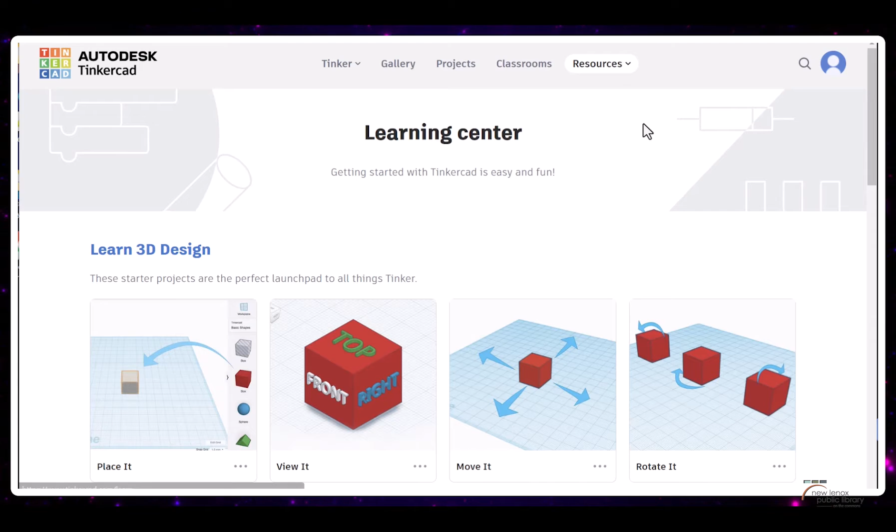So you know the extra resources TinkerCAD has to offer. Now this is my main page, and I'm going to show you how to access the Learning Center. It will give you great tutorials on how to work TinkerCAD, and I highly suggest you try this out first. If you're brand new, you get to learn different things that's going to help you in the future. All of these lesson plans are the first basics that will help you navigate TinkerCAD from the very start, right after you create your account.

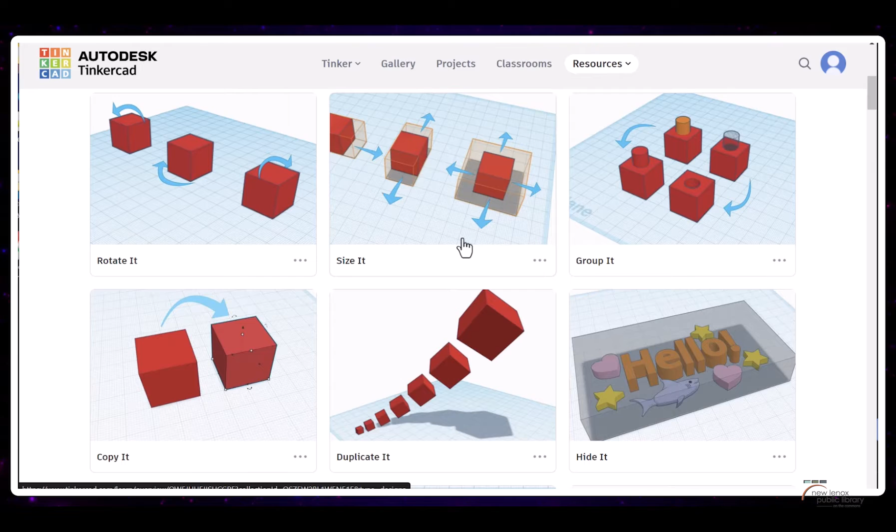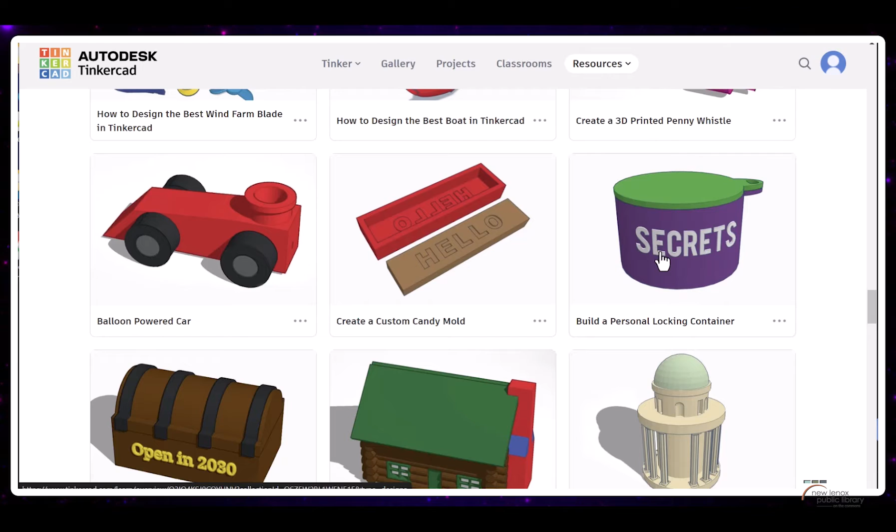So these are some of the easier lesson plans, and some of them are really quite fun. You can make a whole set of your own buttons, a keychain, glasses. There's some fun stuff on here. This month we're going to use one of these: build a personal locking container. I chose this one because I thought it would be a unique build, and also it creates a different kind of challenge, because this is about learning how to twist an object into another object.

With that being said, you can access this here, or if you go back to your main TinkerCAD page by clicking on the logo at the top left, you have classes, TinkerCAD challenge. In this section, this is what I can see. You can't see anyone else, but I just want to show you from my standpoint how I'm able to assign something to you. So I did assign that.

I'm going to go into activities up here, and it should be in here: build a locking container. If you do not want to sign up for the TinkerCAD challenge, you don't have to. You can always go back, like I showed you last time, to Learning Center when you click on resources at the top, and click on Learning Center there to access build a locking container. Just be on the lookout for this challenge.

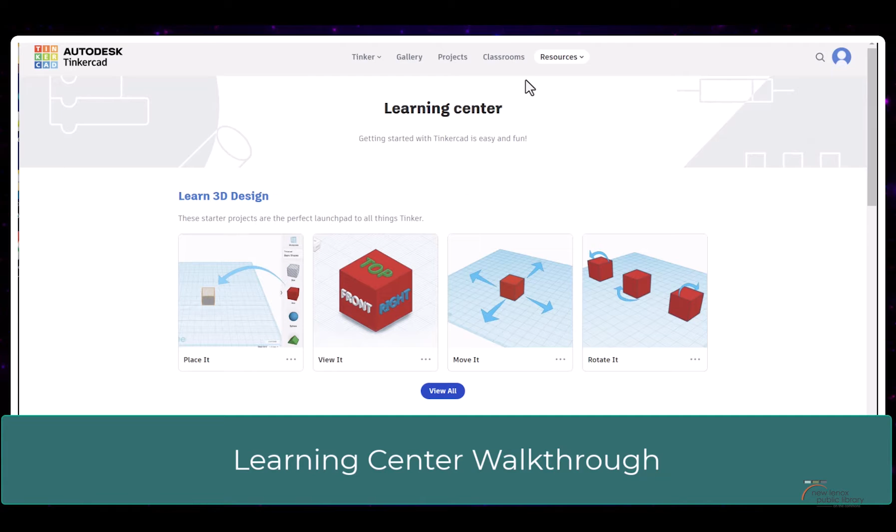So this is what building a locking container looks like from this page. I'm going to click on Start Tutorial, go to Learning Center, and go to View All. Through the Learning Center, you're going to find Build a Personal Locking Container.

Now, I already added it to class activity, so if you wanted to do that, you can go into the class activity section and find it. But here, it has 3 tutorials. I'm just going to do the first 2. The third one involves adding text, and you're welcome to do that if you want. I'm not going to do that for mine because I just want to show you the basics of how to make the container. So I'm going to click on this.

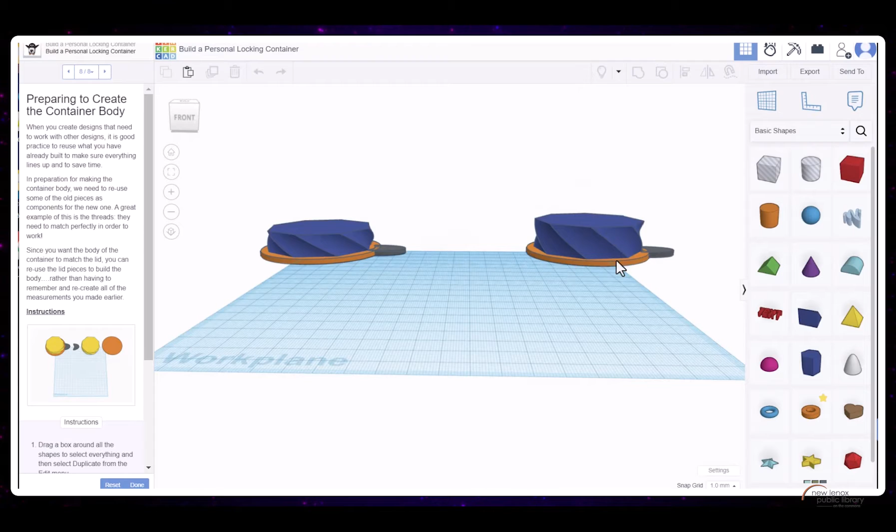This shows me what I have made and how I finished the tutorial. If I were to go back to the beginning, it will look like this: build a personal locking container. So I'm going to start following along with the directions.

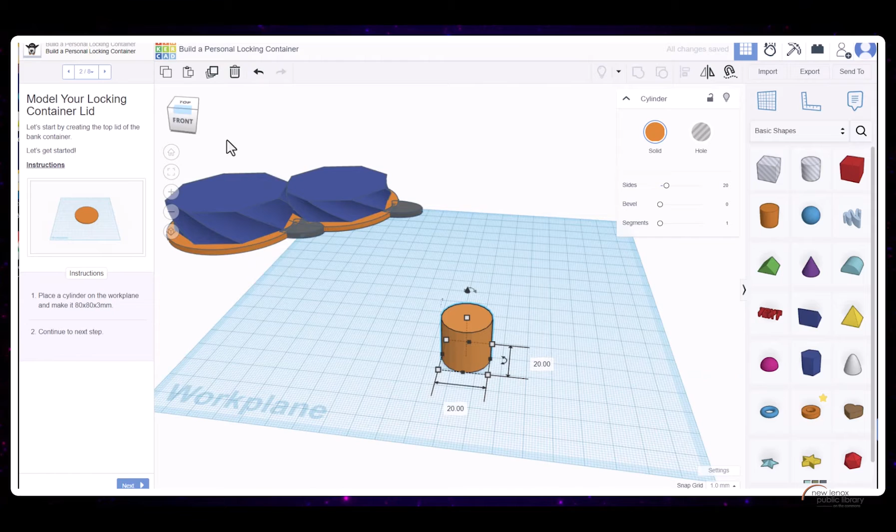The first instruction is to place a cylinder on the work plane, making it 80 by 80 by 3. So I'm clicking on this, changing it to 80 - see, it stretched out one side. I'm going to zoom in on this piece so I can see a little better. The way I'm doing this, I'm clicking on the white corners to open up these 2 menus that give me the width and length, and clicking in the menus to change the size.

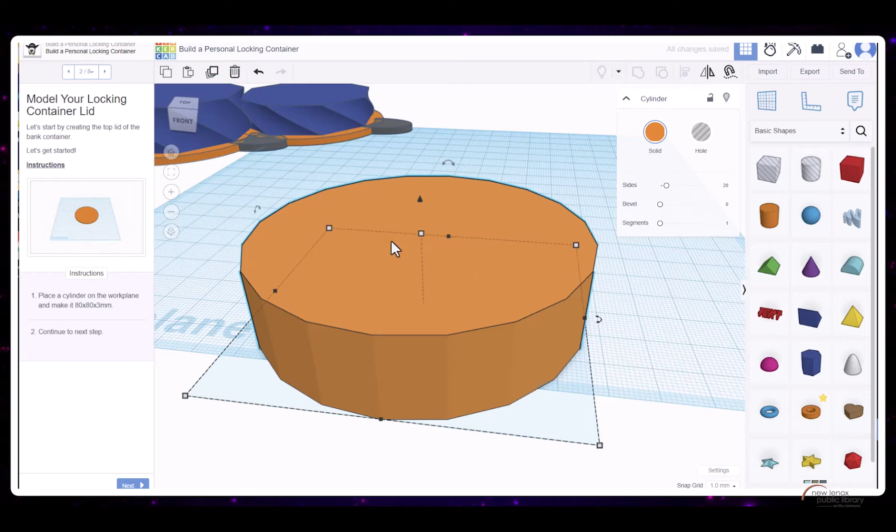Now I'm going to click on the white square that's kind of floating in the middle above everything else. It's kind of hard to tell here, but if I turn the camera, you can see that it goes all the way to the top in the middle.

That adjusts the height, so I'm going to click on that and type in 3, hit enter. So I'm done with this portion.

Add the locking tab. This will go over all the things you need to know about the locking tab. I also want to point out, when you click on the picture, it actually zooms in so you can get a better understanding of how the page is supposed to look. Okay, so I'm in the process of making this gray tab piece right here.

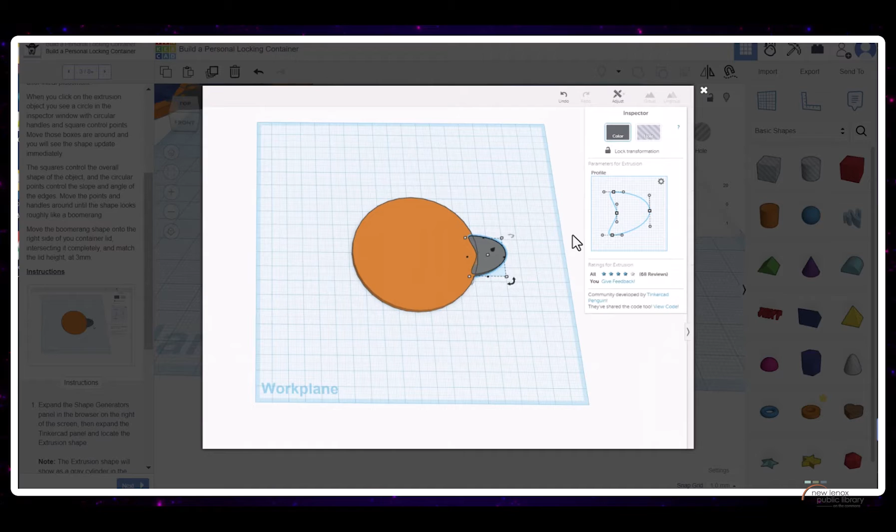It says expand the shape generators panel in the browser on the right. Where it says basic shapes, I'm going to click down at the bottom to shape generators, click that, and I'm actually going to search for this shape using the magnifying glass. We're looking for the extrusion shape, so I'm typing in extrusion.

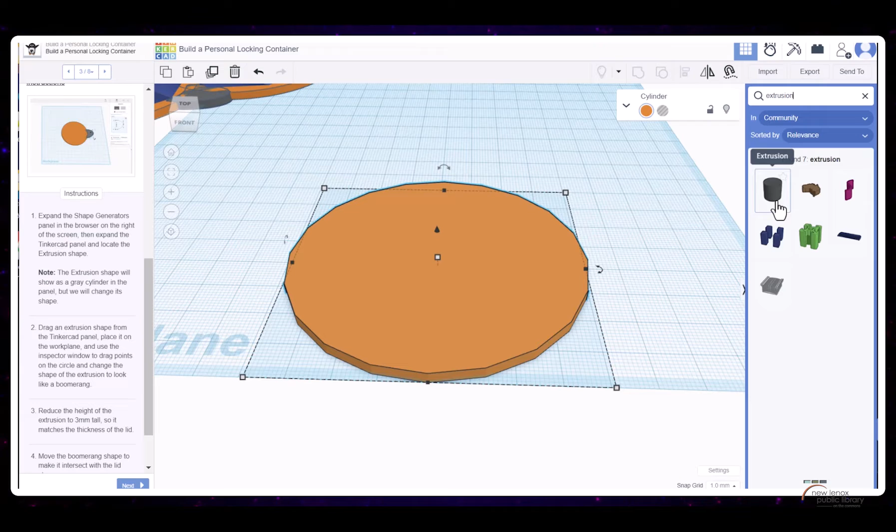And it's right here, it shows a gray cylinder. So this is what I'm looking for, as it says extrusion and it looks like a gray cylinder. I'm putting it down right there, and I'm going to close this out.

It says use the inspector window, so I'm going to move this over so I can see what it's doing from here a little better. So this is the inspector window, and reduce the height of extrusion to 3 millimeters tall.

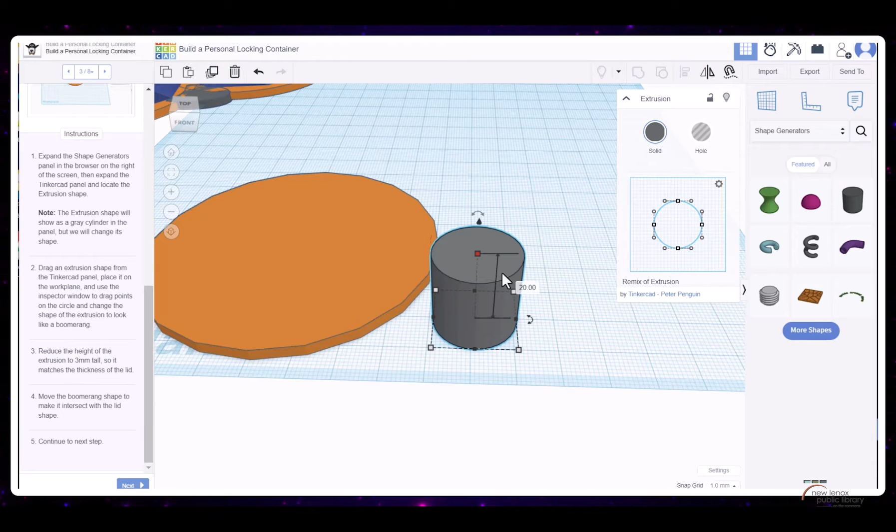I'm going to open up the image again. So it kind of looks like a D shape, but with that one edge pulled in a little more. I'm going to follow that a little bit. As you see, as I'm moving it, it's actually adjusting it.

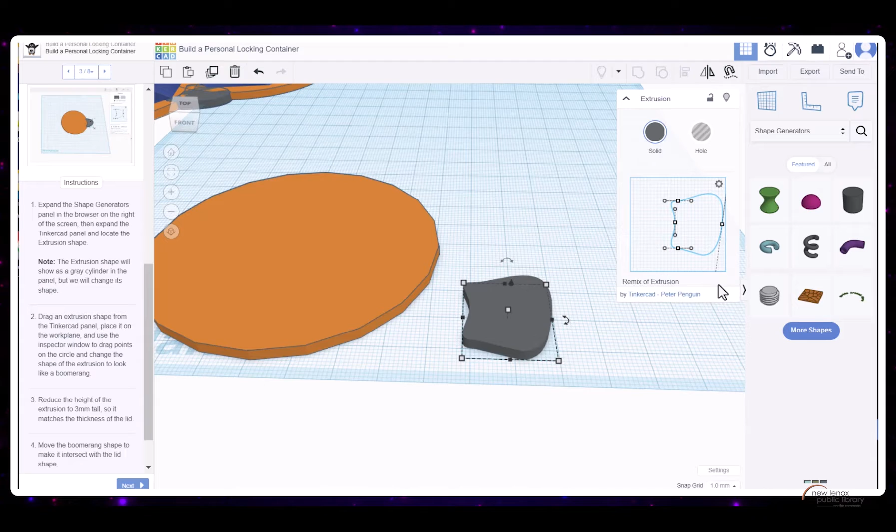The way you can round it out or pull it back a little more, these little arms that are off the squares, they allow you, if you click and pull, it actually expands them, or if you put them closer, it retracts, so it's more pointy or more rounded. I'm gonna leave mine like that. I think that's good, it looks pretty similar to the picture.

Now it says reduce the height, I already did that. Now move the boomerang shape to make it intersect with the lid shape. The way I could tell it's intersecting is because the corner of the shape is gray, so that's how I know it's intersecting, and I can kind of see the colors merging together.

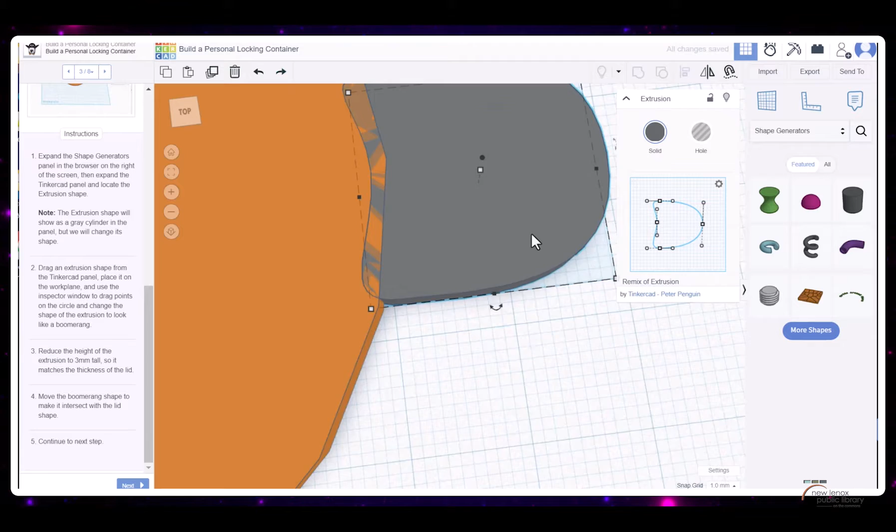Now I'm going to continue to the next step. It says make some threads. Here's the part where I did have to change this a little bit, because TinkerCAD no longer has this shape, it's called something else.

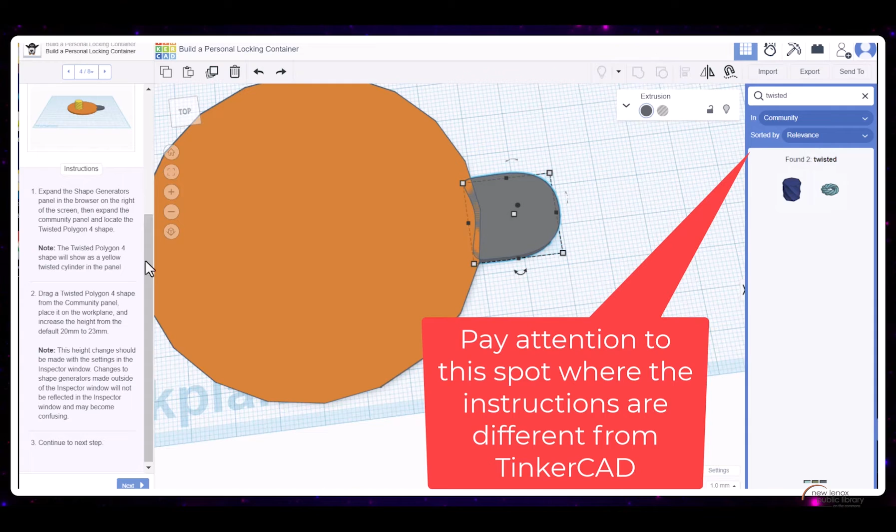I'm going to search the shape and type in twisted. I'm talking about the twisted polygon shape. It has twisted polygon, but it doesn't have twisted polygon 4, so my guess is they probably got rid of that shape because this one serves the same purpose. Okay, so I'm pulling out the twisted polygon shape.

It's blue, not yellow like it shows in the picture. It says drag a twisted polygon shape from the community panel, which was here, and place it on the work plane and increase the height from the default 20 to 23. So I'm clicking on the height, it says 20, and I'm changing that to 23. It doesn't look like it changed much, and now I'm going to continue to the next step.

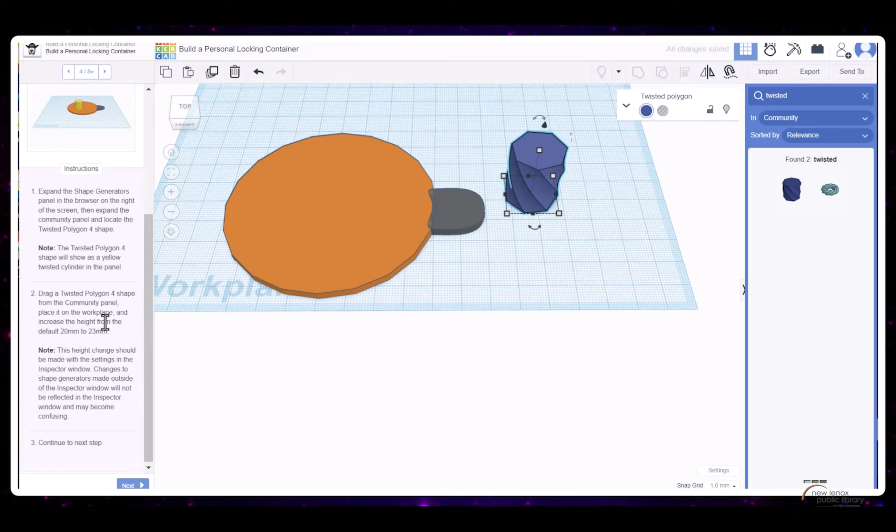Okay, so align the threads to the lid. It says hold down the shift key, so I'm holding down shift on the keyboard and click twisted polygon, then select the lid at the same time. I'm going to hide these other shapes because we don't need to look at these, it'll be a little easier to follow along. So I'm clicking on the twisted polygon, holding, and now I'm clicking on the lid.

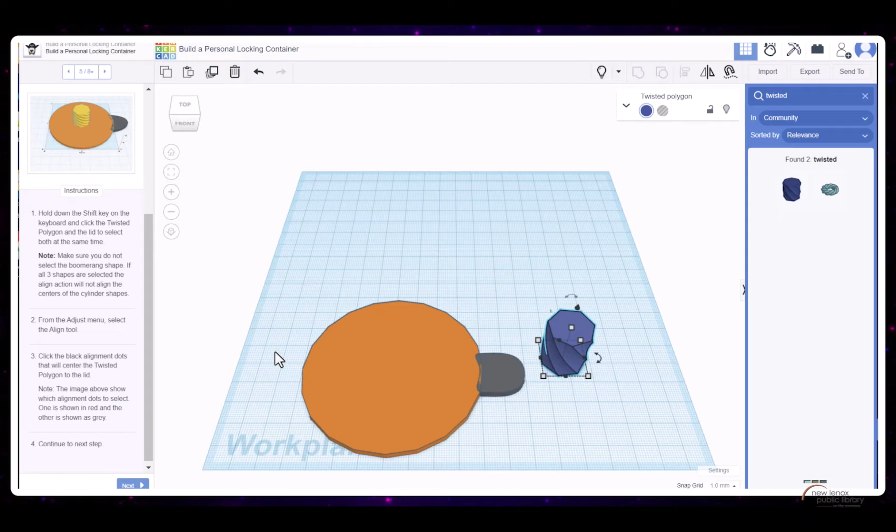It says we do not want to select the boomerang shape, so I'm leaving it alone. Clicking them both at the same time, the twisted polygon and the lid. I'm going to the alignment tool.

Now I'm going to click on these black dots to figure out how to get this centered. I'm going to click on this one, so I'm centering it from the back. I'm going to see if I could... there we go.

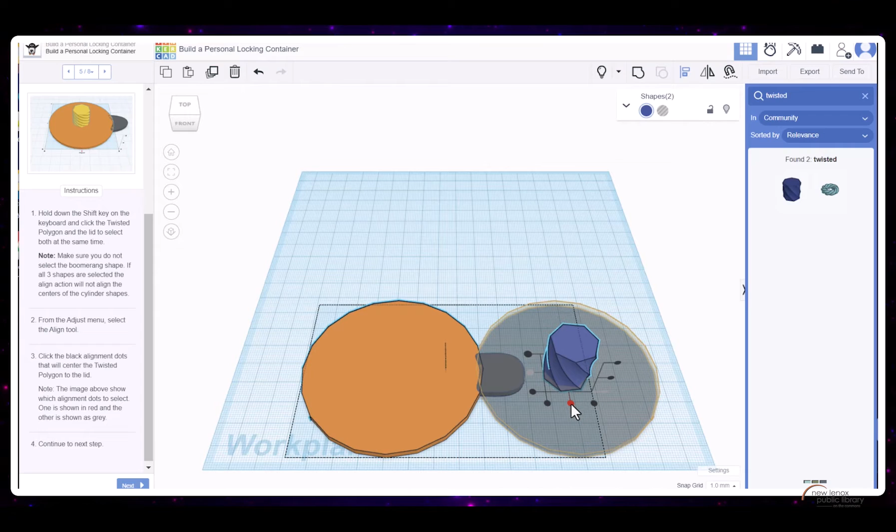Okay, so now I selected the twisted polygon and click on the center here. So now the orange one is centering through there, and now I have to move the tab over, I'm just going to use my arrow keys for that. So it's back where it started from. Kind of looks like a duck face a little bit, it's pretty cool. Okay, so it is centered, and now I'm going to continue.

It says configure the threads.

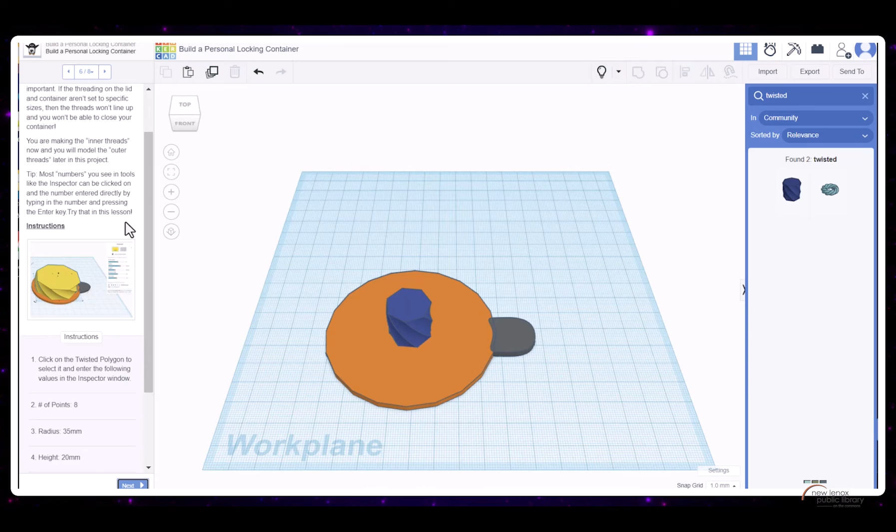So here I'm going to click on the twisted polygon and follow the values that they have. Number of points, they say 8. I'm clicking on the numbers, and now I can type in a specific number, and when I do that, it will change as we go along. Radius is 35, so I type that in.

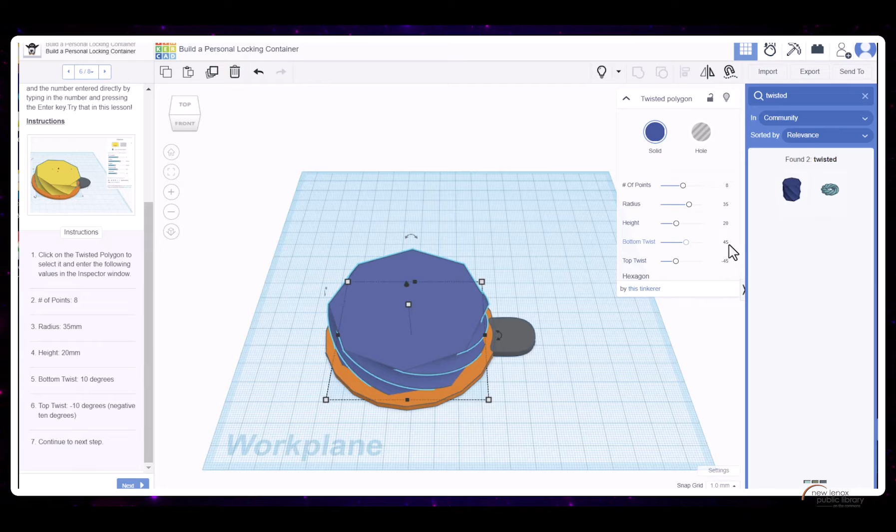This is going to increase the sides. Height is going to be 20, so that's the same. The bottom twist says 10, and I'm going to see if that will work. And the top twist is -10.

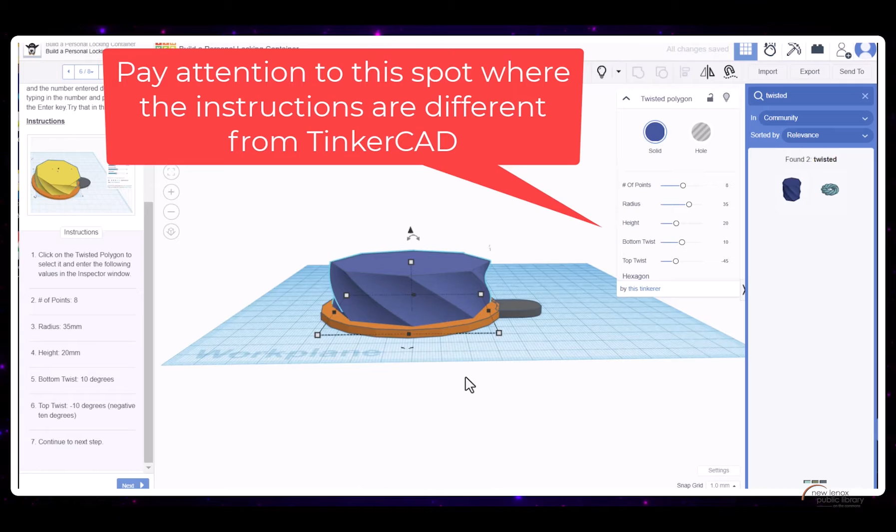So here's where it looks different from the picture. I'm going to click on the picture and show you that it's supposed to look like this. It's not as twisted as it should look. So we're going to keep the bottom twist as 10 and the top twist as 45 or -45 because I think this will look closer to what the yellow piece is, and I think that would serve as a better locking device.

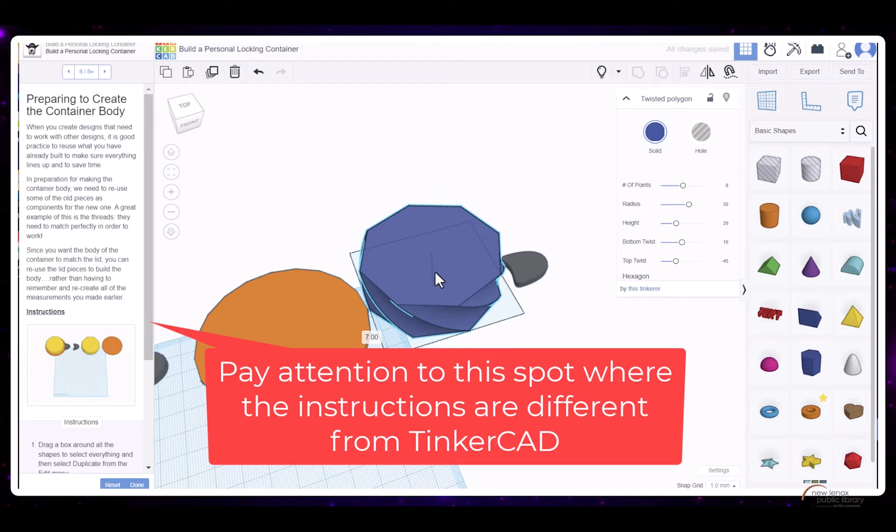So now that that's done, here's another example too where it is a little different. I don't know if back when they first started doing lessons, when you hit done, it moves to the next set and you don't have to worry about saving anything.

What we're going to do here, we're going to select each one separately. We're going to save our shapes so that we can use them for the next step. So in Shapes Library, click on Your Creations, and you'll see some of the previous stuff I've done that I've saved.

I'm going to delete some of the stuff I did earlier with it, so this way I won't get confused.

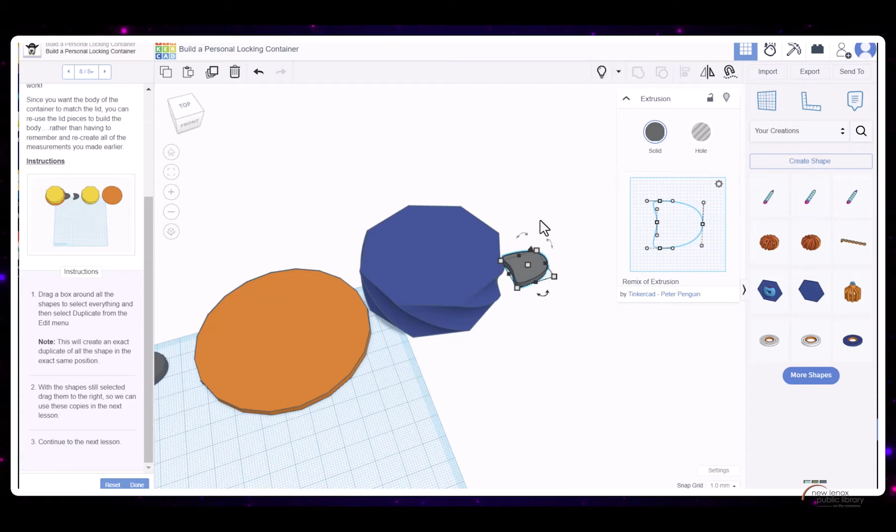But I do want to add each one of these to the shape of my creations. So I have the boomerang tab piece selected. I'm going to hit Create Shape. I'm going to call it the tab, and I'm going to save it.

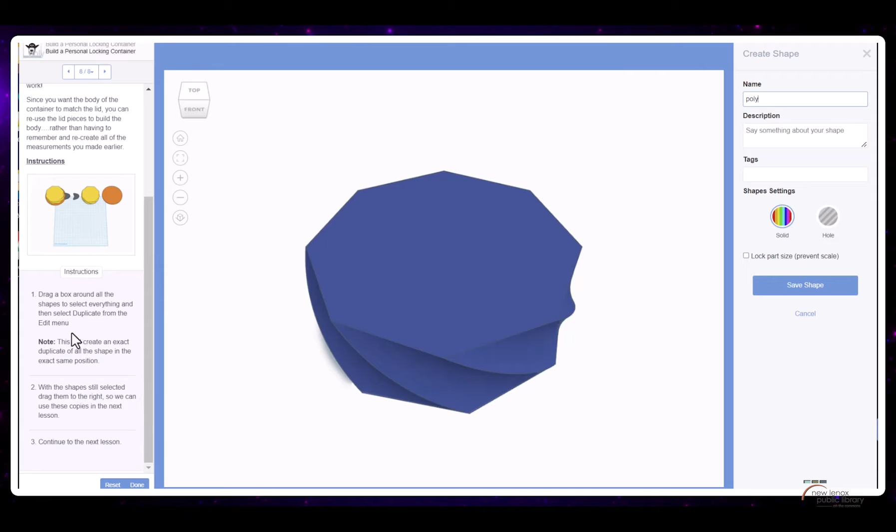I have the twisted polygon now selected. I'm going to create that shape and type—I'll call it polygon. Okay, and now I'm going to select the lid or the top piece, create shape, and I'm going to just call this lid. Save it.

So now all three of these I can access for the next part of it, which we're going to create the body. So now I'm going to hit done, and where it says make the body with a locking tab, we're going to click continue.

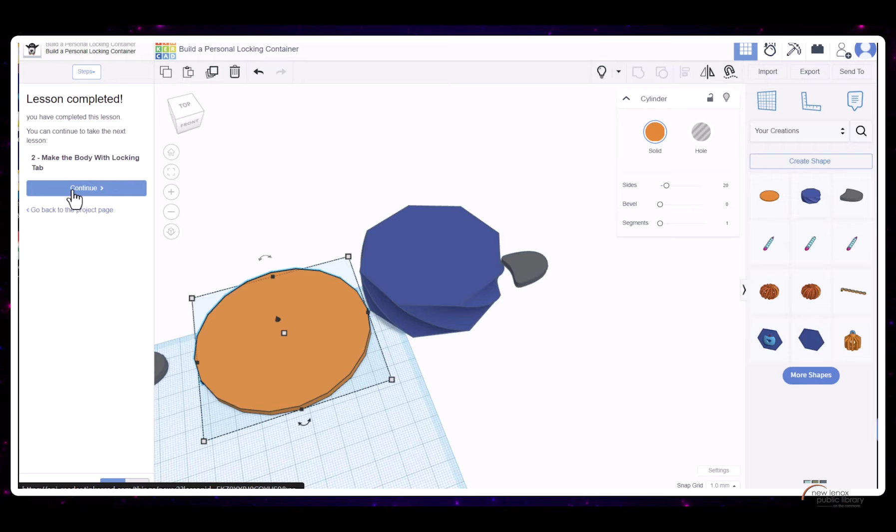Now once again, because I already practiced with this, I'm going to hide these, and it's going to look like your work plane. So I'm going to actually click on that, and this is how yours should work. So this is how it's going to look. I'm going to go to page 2, and it says model your locking container lid.

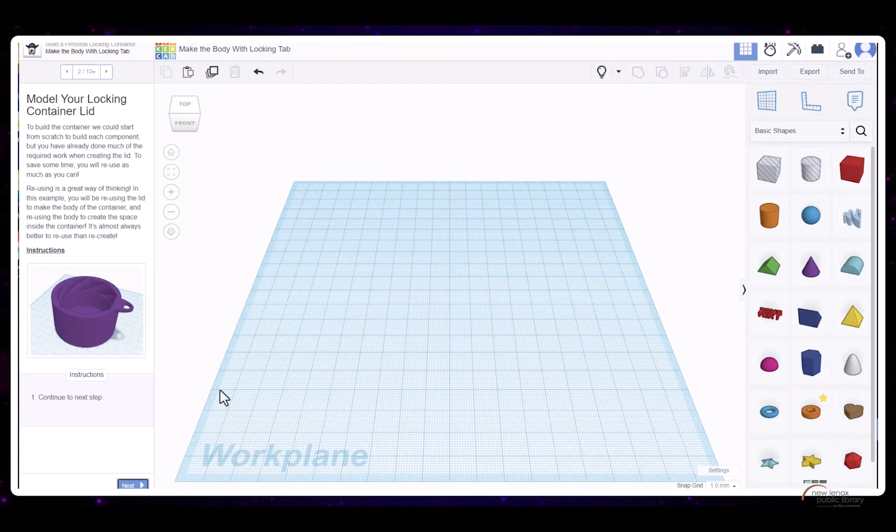So now to build a container, we could start from scratch and build each component. And we're going to reuse the shapes that we already made to make the inside of the grooves, because that's how it's going to fit correctly.

So with your creations, where it said basic shapes, I clicked on your creations. I'm going to drag out the lid. Now when I do that, I'm going to make sure it's still selected, click duplicate, and I'm going to use this lid as my base for the body.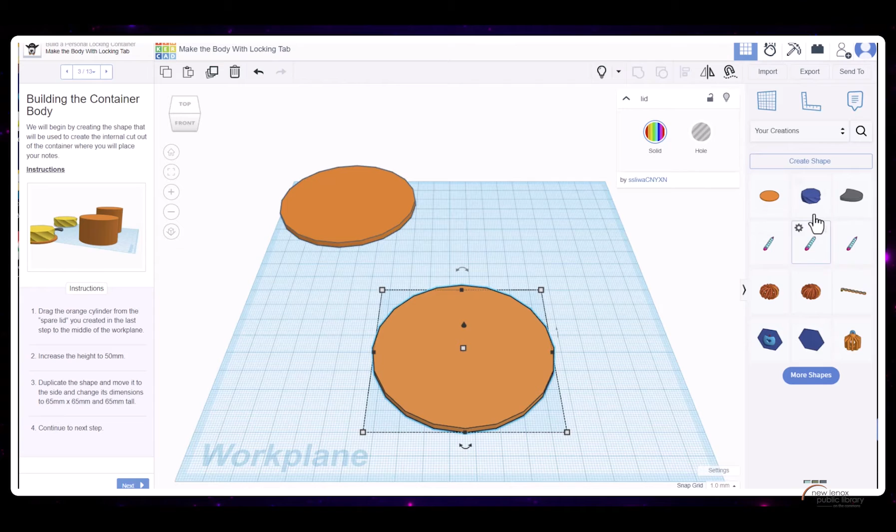So this is my spare lid. In the meantime, I'm also going to drag out the other components too, just to have those ready. So now they're all right here, ready to go. Kind of put them all together too. I'm not going to group them just yet, but I'm going to leave them like this.

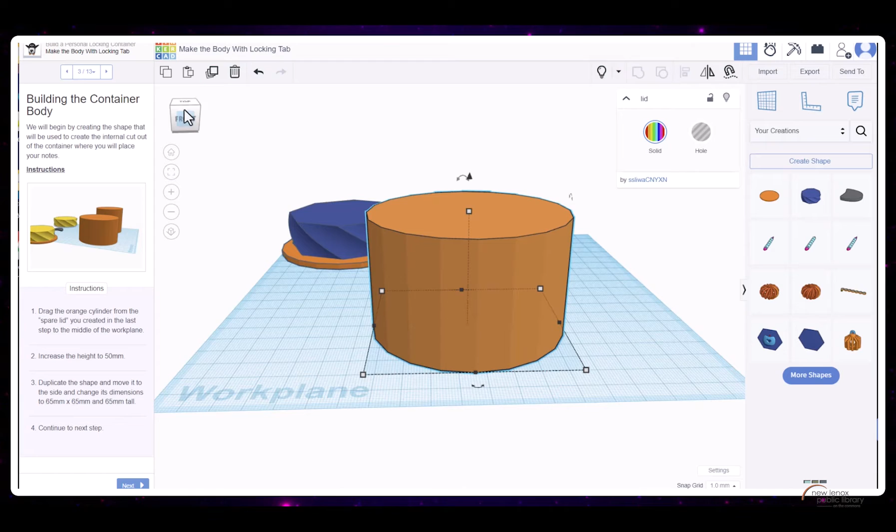So it says increase the height to 50. Duplicate the shape and move it to the side, and it changes dimensions to 65, 65, and 65. Just moving that—this is my duplicate, so this would be 65, 65, 65. Okay, so that's all set.

I have these two shapes. You should have those two shapes too. Now I'm going to click Next.

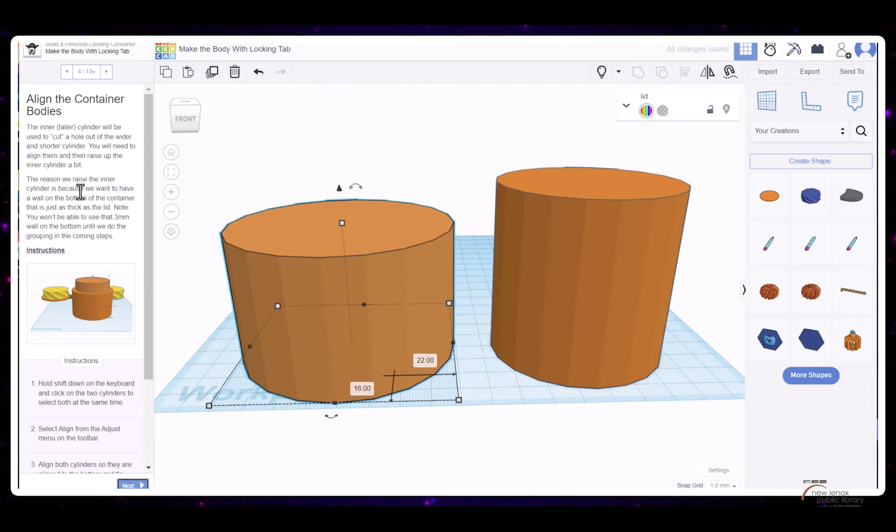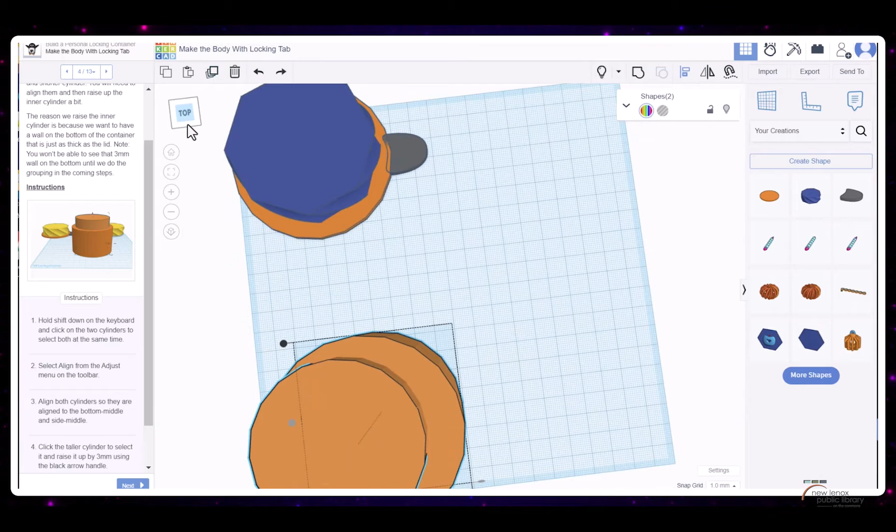The inner taller cylinder will be used to cut a hole. So now I'm going to hold Shift, click on two cylinders and select them both, and we're going to do the alignment tool again. Okay, now I want to make sure that I'm trying to see if I can try to move this over. Maybe it will help if I have a top view. And I'm going to focus strictly on these two.

There we go. So I had to click on the two middle pieces and align them together.

Now it says click on the taller cylinder and raise it up by 3. I'm on the front view, which will help a little bit. When I click on the arrow up caret, I get the option to type in 3, or you can move it by yourself. So I'm moving it up to 3. It went from 0 to 3, and down here it shows 3. Click on the next step.

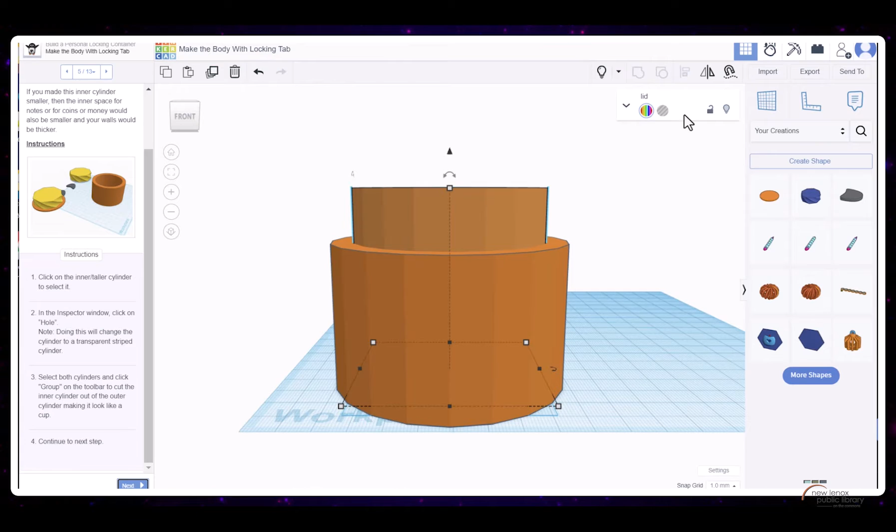It says click on the inner taller cylinder, so select it, and then click on hole. Now I'm going to select them, holding Shift, and selecting the base and hitting this group key up here. So now it should have cut a hole in it, so it does look like a little container right now.

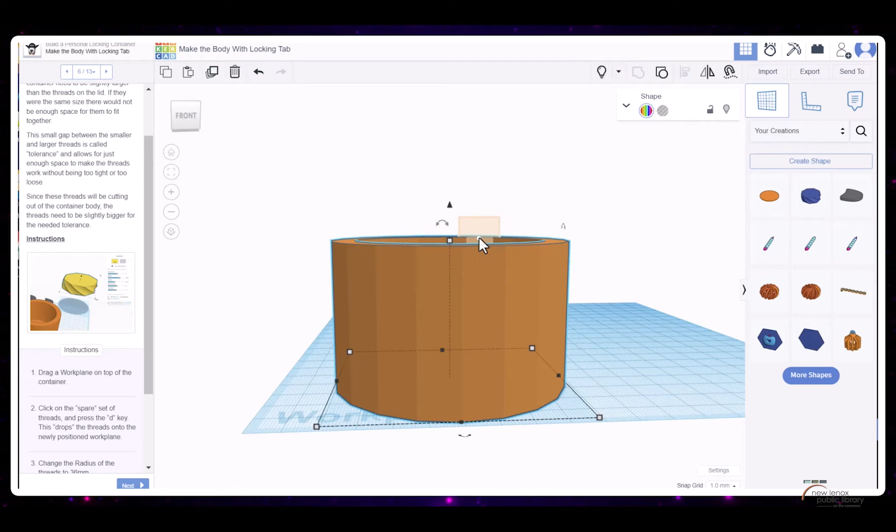Click Next. So now we have to drag a work plane on top of the container, using the work plane tools right here. I'm dragging the work plane on top right here, and click on the spare set of threads. I'm going to drop this by typing D, and I have to change the radius to...

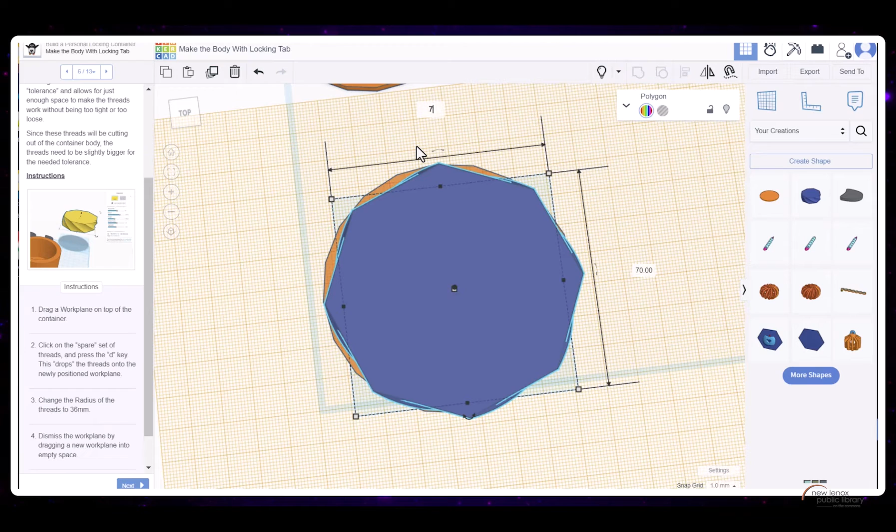36. Unfortunately, I can't change the thread shape once it's been saved, but if I change the radius—I know 36 times 2 is 72. So these are 70, and I'm going to change this to 72 and this to 72. The idea is if these are 72, the lid should fit inside here, because the top has to be a little bit smaller than the bottom so it can actually fit. If you have them both the same size, they just kind of click together—they can't even go into each other. So that's why you have to have a different size for those.

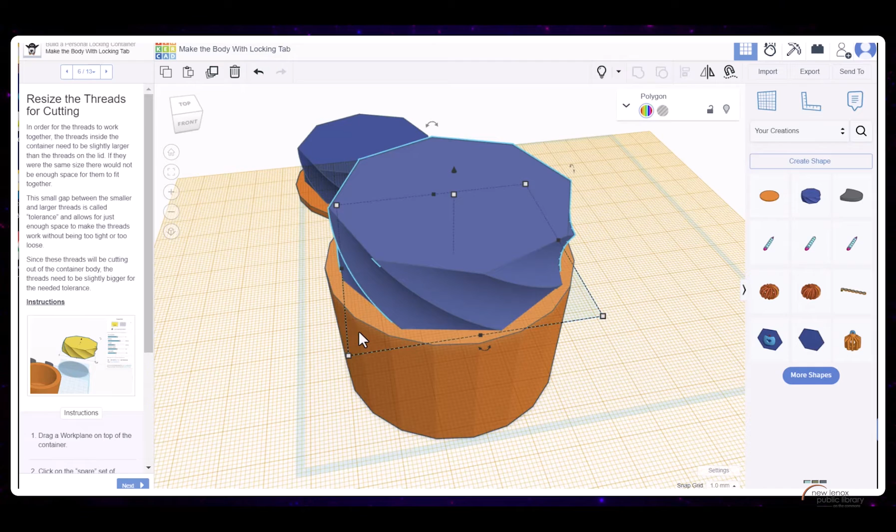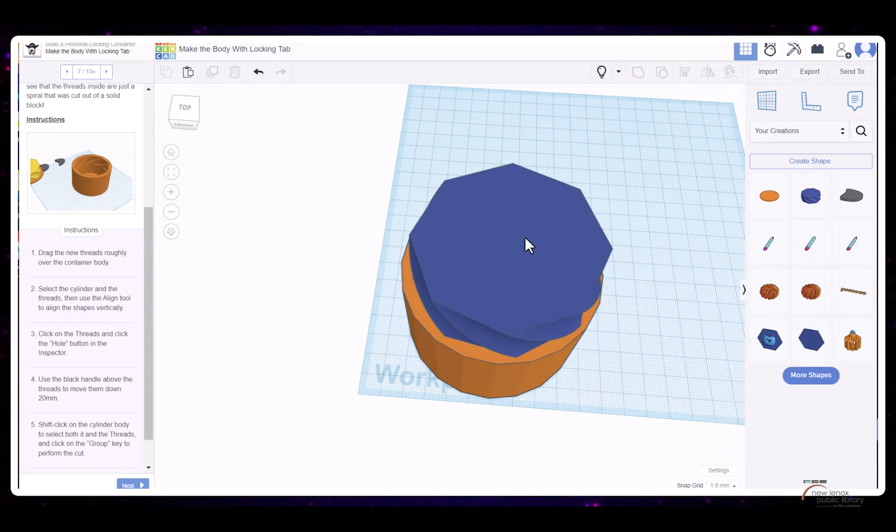Okay, dismiss the work plane by dragging it to the empty space. Continue to the next step. Now we're going to cut the threads into the base. I'm just going to hide this section for now, and we'll go back to that. I want to focus on this so everything will look cohesive and we're not looking at anything else.

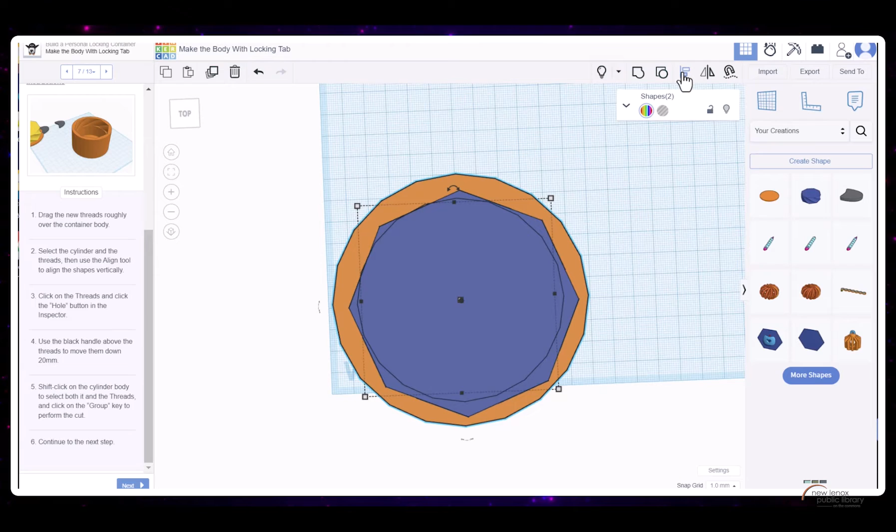It says drag the new threads roughly over the container body. Select the cylinder and threads and use the Align tool to align the shapes vertically. So I'm clicking on this, and I also want to make sure on top I have the thread still selected. I noticed that it's not perfectly centered, so I want to make sure these are centered, and I have to make sure this goes...

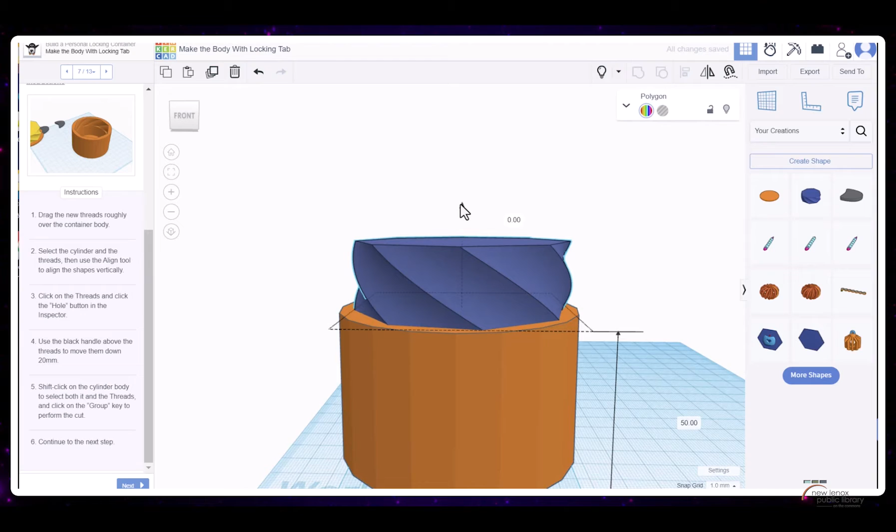Okay, use the black handle above the threads and move them down 20 millimeters. I think because I have this orange thing floating, I'm going to actually move this down. Should I hit D? Drop them a little bit. Now I'm going to hit this and move it down 20. When I clicked on the threads it came up as 50, so I'm going to move it to 20. I feel like that's too far down, so I might have to change this and move it up—type in 35, I think that will be a better size.

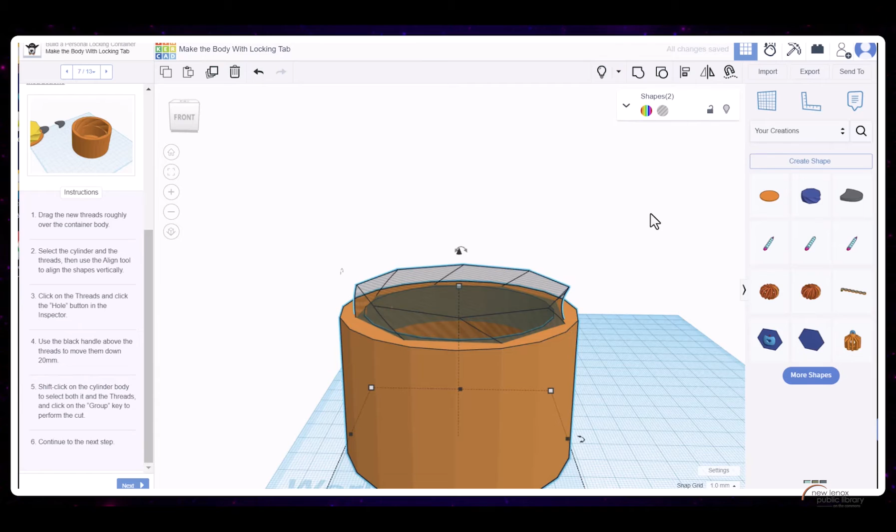Now I'm going to click on Hole, and now I have them both selected. I made a little red box around both of them, and you see shapes up here—both of them are selected too. Okay, so it looks relatively like the picture.

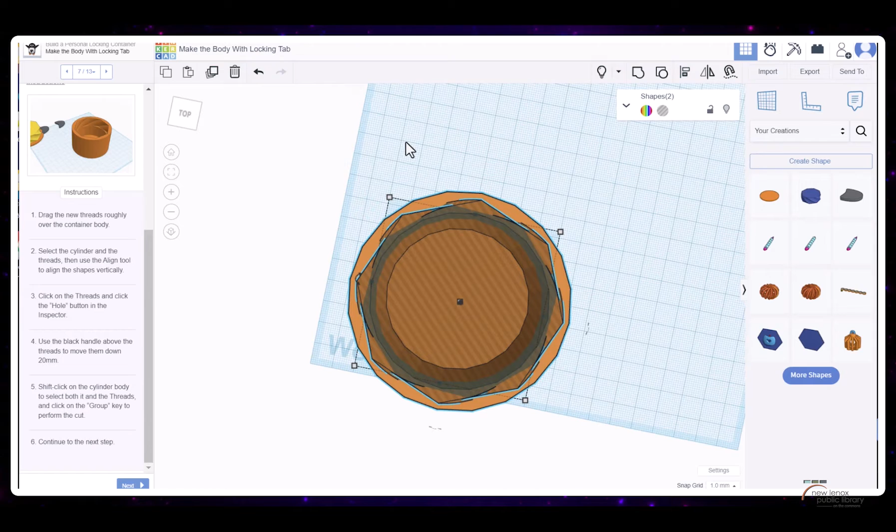So just remember, when I changed the threads, I only moved them down to 35. It still doesn't quite look even, so I'm going to go in and make sure this is symmetrical as possible. I tried to align it, but I think it's a little bit more on this left side, so I'm going to select them both and see if I can line them again.

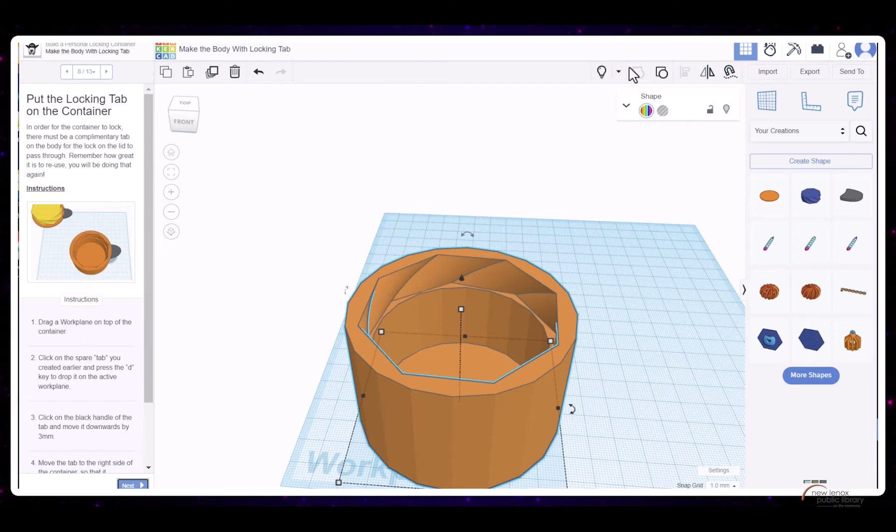There we go. I had to click on this bottom black circle, and the dots seem to help align everything. Now I have them both selected, so I'm going to group them. Perfect—so your container should look something like this, and it should be ready for the next step. I'm going to click Next, and now we're putting the locking tab on the container. Because I did hide the lid, I'm going to click the little Show All.

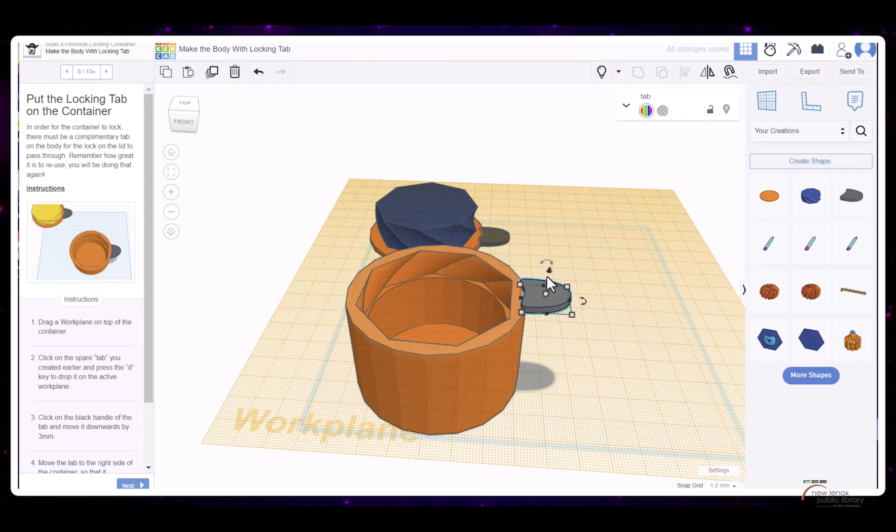Okay, so now we're going to create the tab for this. We're going to grab another work plane and set it on top of the body of the container, and now we're going to grab that tab and put it right there. Hit D, and it should drop it. I think I already have mine at the bottom. Now it says we should move it down 3 millimeters.

And there we go. I'm going to zoom in so you can see a little better. It definitely looks like it has set in there. So it's all set to go.

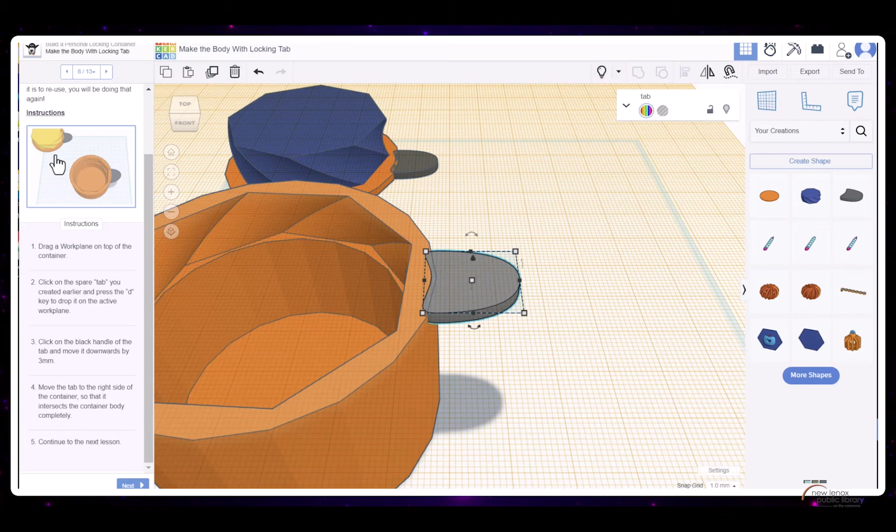I'm going to match from where this tab is to where this one is. I'm just going to rotate this. So I clicked on the container and I'm holding rotate. Just rotate it right about here.

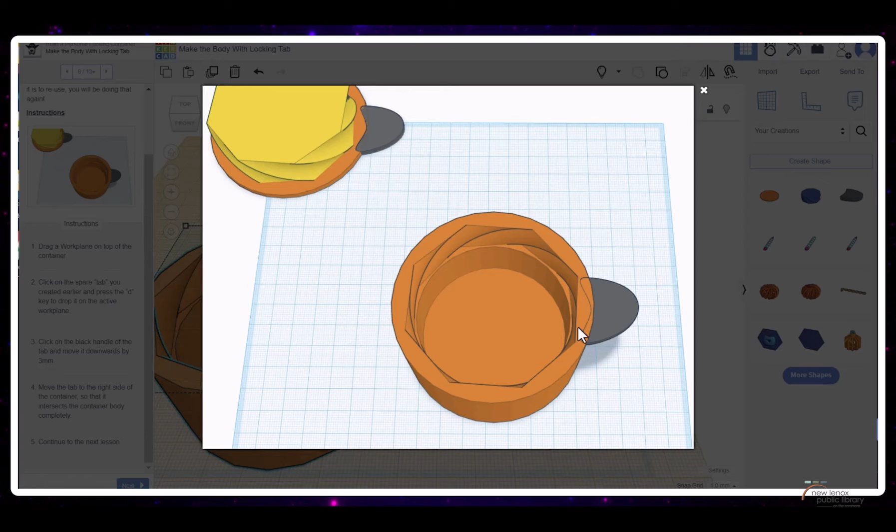So what I'm thinking is it should connect. This corner and this corner should be connected. I'm going to look in the pictures to see if that's the same over here. It does look like it. So this tab and this tab are in the spaces, which is the same over here. They're in the spaces. So because mine's at the end, I'm going to keep it at the end and it should lock together.

Okay, now I'm going to drag a work plane off into the distance and continue to the next lesson.

Grouping and orienting. So drag a box around the lid you create at the beginning and click Group. So I clicked, I'm dragging a little red box and clicking Group. You don't have to drag it over the whole thing as long as all three of the shapes are selected.

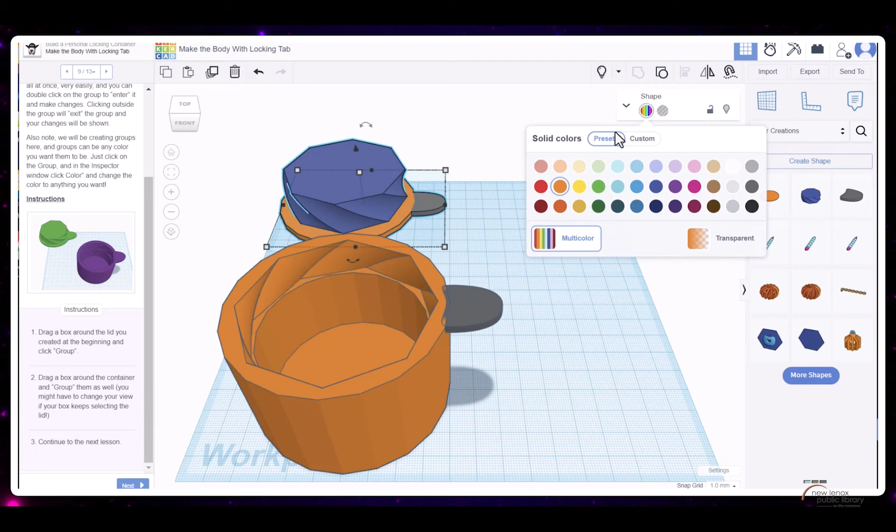And I'm going to just change them one color so I can be sure that they are all grouped. I'm actually changing it to the same color as this one. Now I'm dragging the box over the tab and the container and clicking group. And I'm going to change the color to purple.

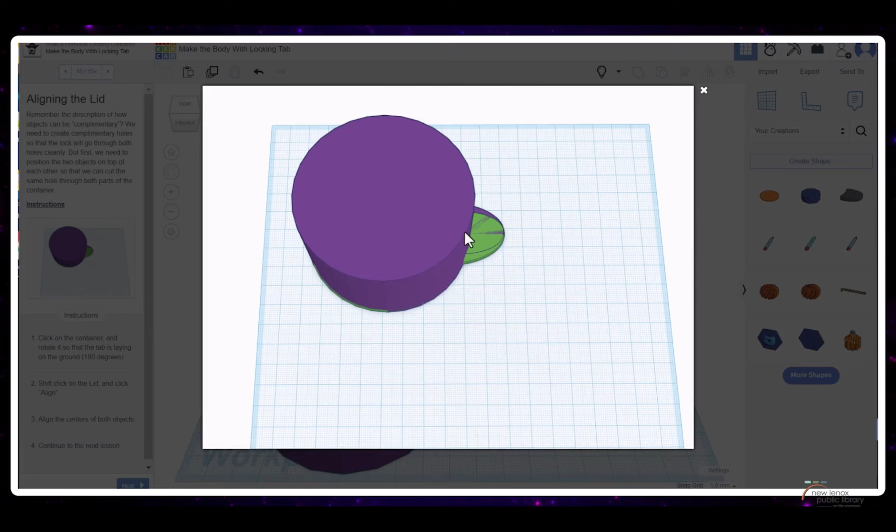Okay, so almost done. Next lesson, aligning the lid. So now we have to create a hole over both these tabs to make sure that they can actually be locked. So it says click on the container and rotate so the tab is laying down on the ground 180 degrees. Clicking and rotating it.

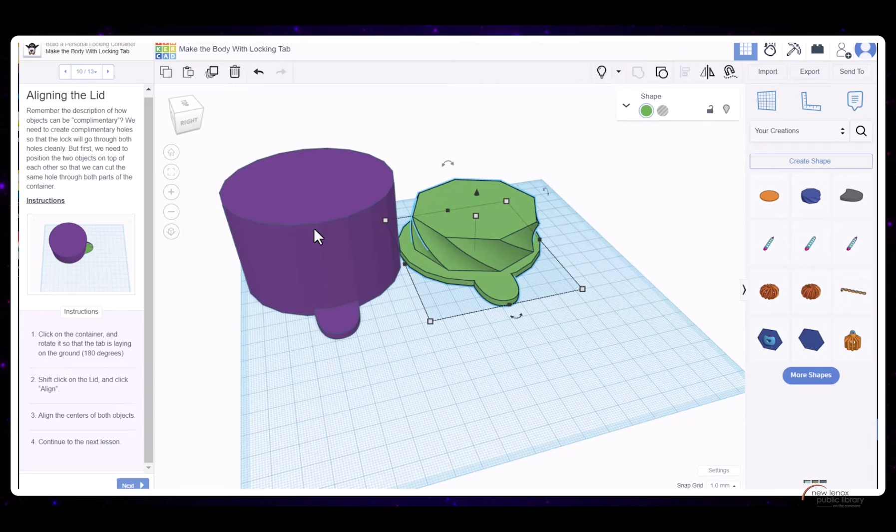And shift, click on lid and click align. So I aligned them both right here. So it does look like they are slightly off, but if we create a hole big enough, it shouldn't be that big of a deal. Yeah, as long as we create a hole that's big enough to fit both of these, it should be fine.

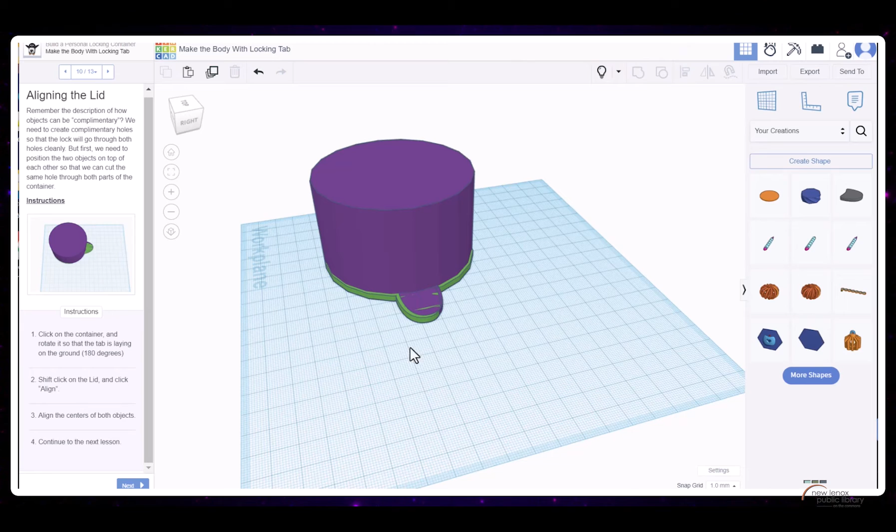So now we're going to line up the centers of both the objects. So I'm going to just pull out the tab I made before, and I'm going to change this to be smaller. So it's 21 by 20. I'm going to change it to 13 by 13.

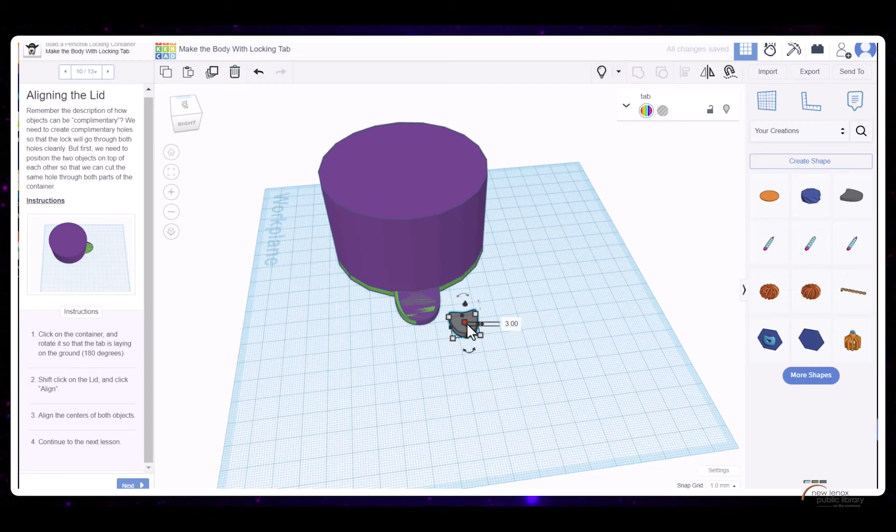And I'm also going to increase the height. I'm just pulling it up to make it really tall. As long as the height is taller than 3 millimeters, you should be able to make a hole in your tabs.

Now I'm just going to push this through both of them, and I'm going to click duplicate. So I'm going to select one, hold shift and select the container, hit group.

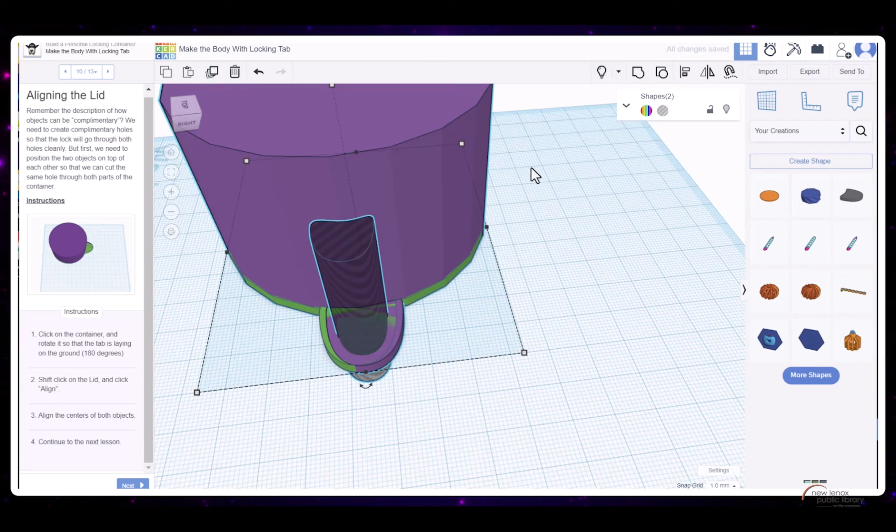Okay, I'm going to move this off. This over a little bit. Click on the other hole, hold shift and select the lid and then group them.

Okay, so now I have both the container and the lid, and they should be ready to go. I'm going to continue to the next lesson.

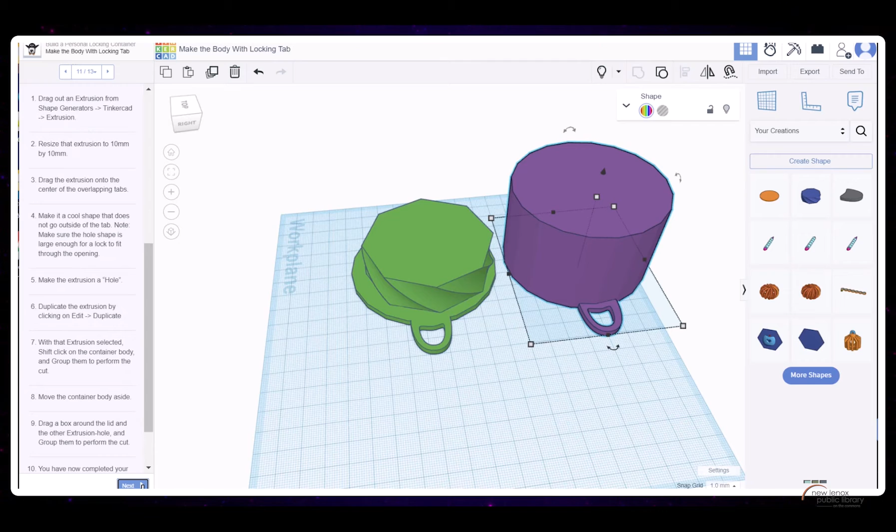So I already sped through and did this part, so I'm just going to click next lesson for this. And overall, this is what you should be done with. I didn't have to do anything else.

If you want to continue and add more personal touches, you can. Now, because these are two separate pieces, you are welcome to have two separate colors. We can only print one piece in one color. That's the limitation our 3D printers have. So say if you did want the body in purple and the top in green, we can do that, but we can't do half and half of both pieces, okay?